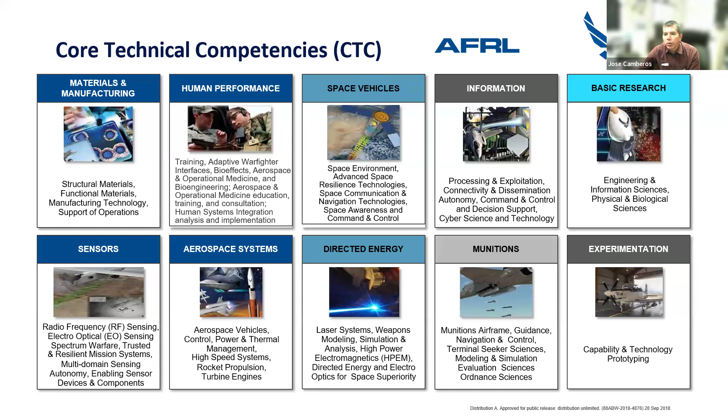The Air Force Office of Scientific Research, where anybody working in academia should be partnering with in terms of basic research, is headquartered in Arlington, Virginia. The experimentation is spread throughout the various locations where the Air Force Research Lab has a presence. You can read the details of this - these slides will be made available, and I'll give you a website where you can check out more.

The way that the Air Force Research Lab invests their funding, which comes from congressional and presidential action, is through basic research, where a good chunk of money is invested primarily through the Air Force Office of Scientific Research and other ways that we utilize that to basically discover new things, test new ideas, ask what-if questions.

The bulk of our funding goes to applied research. The numbers here are just the way that our congressional budget allocates the funding and tracks it. This is intended to develop the science to application. Primarily, we've done some discovery, we figured out the physical phenomena, and now we're ready to do some benchtop or smaller scale experiments.

Next to that is advanced technology development, where we also have significant investments into actually getting out there to develop the hardware, fly things and develop things, and implement them in field experiments and tests. Other Air Force funds that are executed support small business innovation, the SBIR program through the AFWERX program, experimentation, and other investments made to small businesses and also the academic community for supporting non-research and technology development.

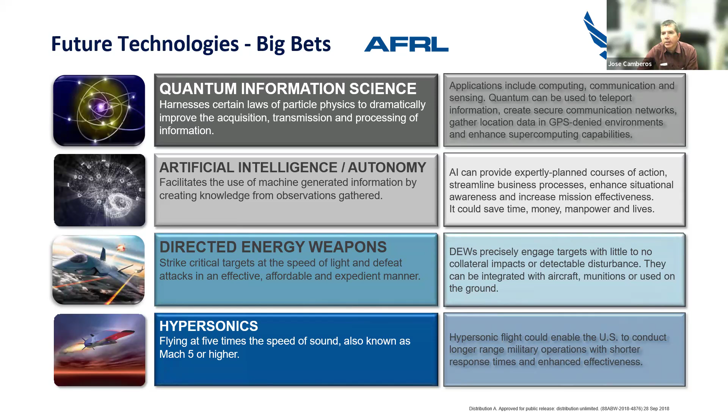And last but not least, hypersonics, my area of interest. We are investing in capabilities that will support our ability to field hypersonic systems now and into the near future. Next slide, please. So how do you partner with AFRL?

There are a variety of ways that you can do that. We should count OFRN, the Ohio Federal Research Network, as part of this ecosystem, if you will, of ways to collaborate.

You can get a lot more information at the afresearchlab.com webpage, where you can find out more about each of the directorates, points of contact, and how to apply for everything you might need - for small businesses, scholarships, fellowships, internships for students who may be interested in working in these areas. And of course, you can always check fedbizops.gov for solicitations for proposals.

We have various centers also to support that. And one last thing - check out YouTube. We all like to watch YouTube, right? We probably don't want to admit how many Saturday mornings we've wasted doing that. But check it out - look for AFRL Inspire for a sampling of videos AFRL has put out on its innovative work.

Next slide, please. Okay, on to hypersonic vehicle technology and some major developments. From here on, the slides are stuff I've used when teaching classes in hypersonics at the University of Dayton and at Wright State University.

Next slide. It begins, believe it or not, soon after the Wright brothers flew. For this seminar, I'm going to talk about hypersonic flow, how we need to understand the relevant physical phenomena that drives our approach to hypersonic vehicle analysis and design. Next slide.

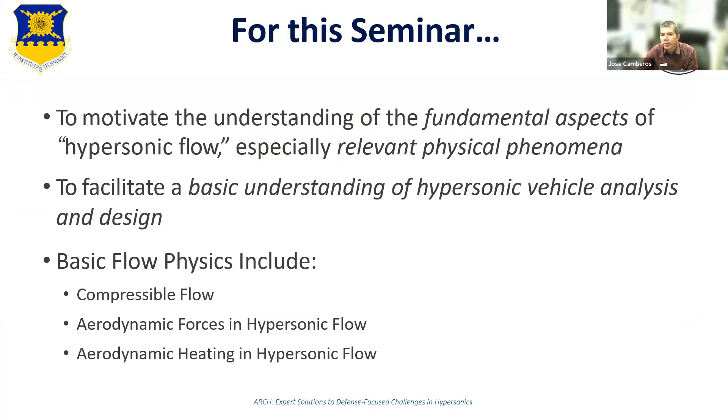It's all about the heat, as I like to say. AFRL has identified hypersonics as a game changer, so to speak.

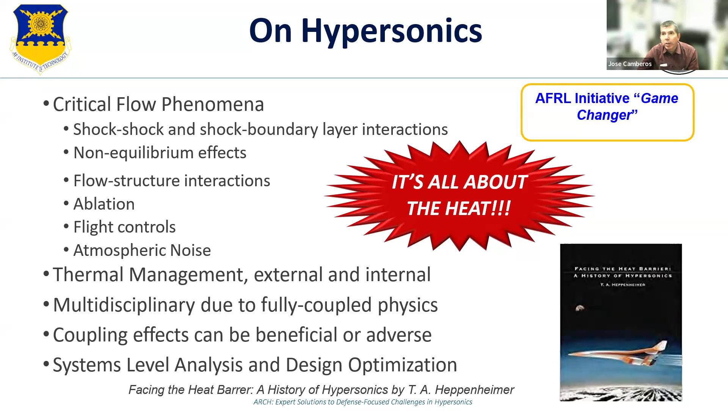If you're interested in some of the history behind hypersonics, there's a great book by T.A. Heppenheimer. It's publicly available, a NASA PDF publication. You can search for it on the web and obtain it. It's a great historical read all the way from essentially the Bell X-1 onto the NASA program from the 1990s.

Next slide, please. So back to the technology. Believe it or not, soon after the Wright brothers flew, there was already wanting to go faster and better, and the technology was starting to catch up.

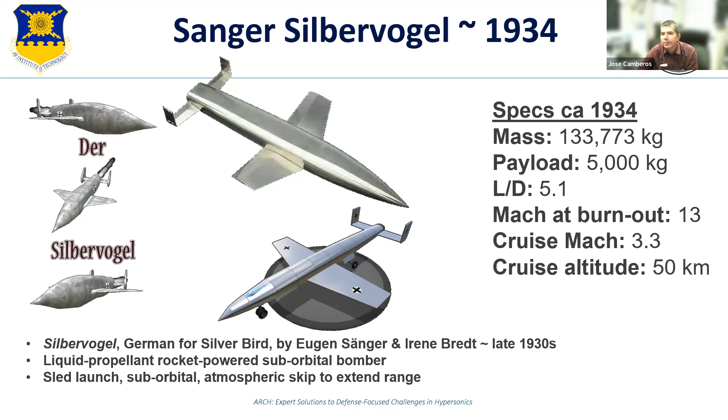The other lesson learned here, of course, is do not name your program after an extinct species. It just gives it bad optics.

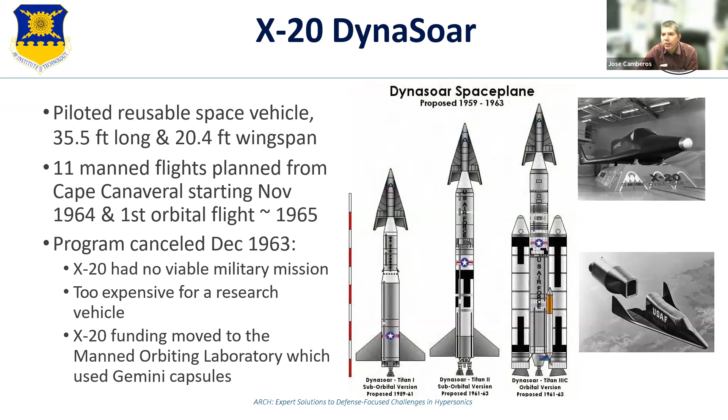So next slide, please. The X-15, one of the most successful hypersonic programs that we've conducted from the 1950s to the 1960s. 199 flights out of a planned 200, and the only reason the last one didn't take place is that, of all places, in Southern California at Edwards Air Force Base, it snowed on the day that they were planning that last flight. 3 vehicles were produced.

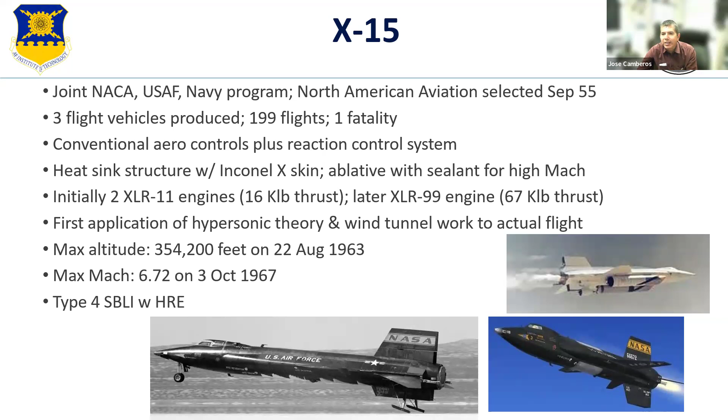We lost one. One is hanging at the Air and Space Museum in Washington, D.C. The other one is right here at Wright-Patterson Air Force Base. Come and enjoy it. Those of you that are in Ohio, come visit the Air Force Museum. I'm happy to go there, meet you there anytime. I need no excuse to go to the museum anytime for anyone that would like to enjoy the airplanes there.

Next slide, please. More recently, we tried to advance the technology in the 1980s and 1990s with the National Aerospace Plane concept. And unfortunately, we tried to rely too much on computational capabilities that weren't quite there yet, and reduce wind tunnel testing. We asked for too many miracles, and this technology remained a paper study. We did expend a lot of money in the research, but the design just could not be achieved.

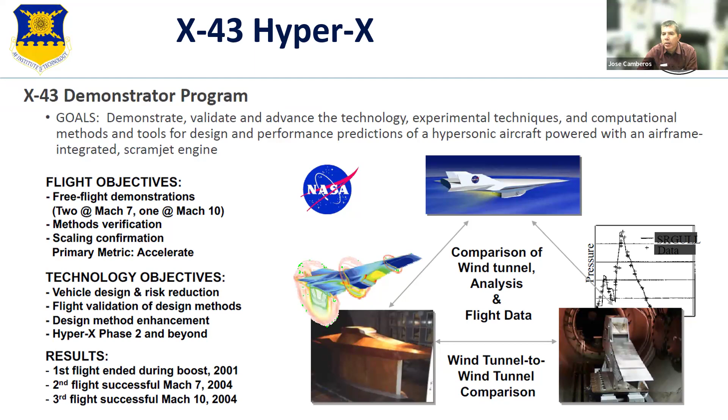Next slide, please. More recently, we have the X-43, the HyperX program. It's a demonstrator program where the flight objectives were really a test of the scramjet technology. This utilized hydrogen as the fuel, and it worked. As far as a test program was concerned, this was a highly successful program that NASA led for our country. Lots of good wind tunnel testing was performed, and it really pushed the advancement of hypersonic technology significantly.

So hypersonic flow, as most of you may know, this is what we teach. Most experts agree that it's around Mach 5 when we consider it hypersonic. There's no magic number where that changes, it's just that certain things begin to happen when you get close to that Mach number. The air behaves differently than our mathematical and thermodynamic models tell us, as it does in subsonic and transonic flow.

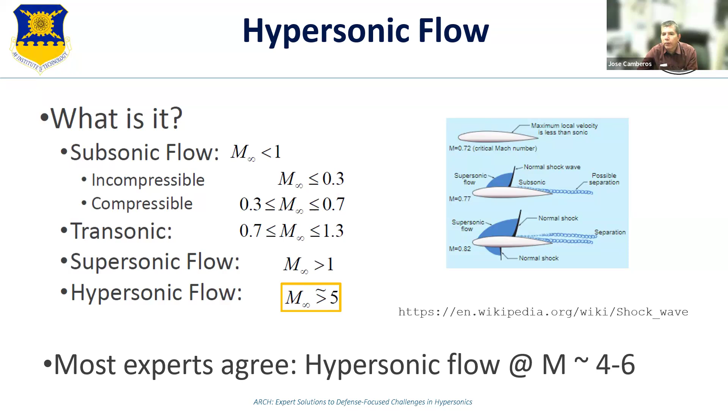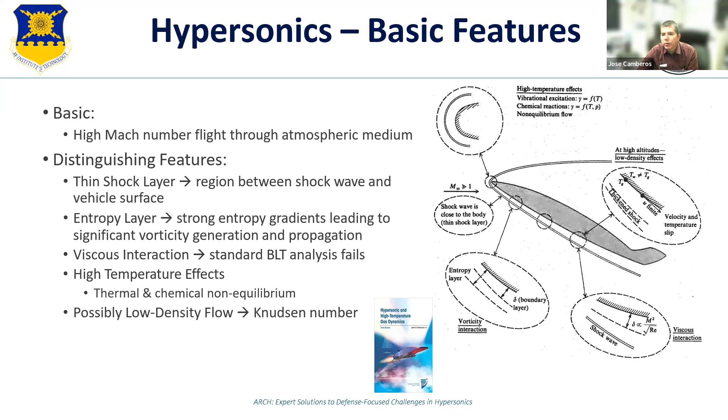So Mach 5 is around where we really look for the physical phenomena. The features we look for are high Mach number, thin shock layer, viscous interaction, and high temperature effects. Remember, it's all about the heat, and possibly low density flows. You can read more about this in John Anderson's book.

Of course, you want to be mindful of these viscous interactions. One surprise that happened with the X-15 program is we had the bright idea of attaching a dummy ramjet engine to test out that technology. Unfortunately, someone missed doing their homework, because the shock interactions with the pylon there almost cost us the vehicle. I can't recall if the ramjet engine was still attached when they landed or not, but as you can see, the shock interactions burned a hole. That is a very strong material, nickel chromium alloy, and the shocks impinging on it were burning through it like the proverbial hot knife through butter.

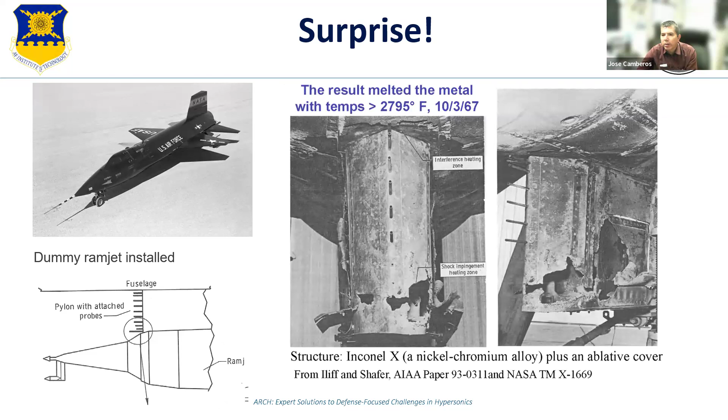So you want to be mindful of the physics that occurs, and also mindful of your models for predicting the things that will affect your design. In this case, a breakthrough occurred in ballistic atmospheric entry by Julian Allen and A.J. Eggers, who determined that the heating is inversely proportional to the radius of your leading edge. That means sharply pointed vehicles are going to suffer extreme heat. So you really want to design reentry vehicles, and be mindful even with high-speed vehicles, that the sharper you make your edges, the stronger the heating. That's one thing I alluded to earlier, when the German concept Silbervogel was very sharply designed. It would not have worked according to what we knew later on in the technology.

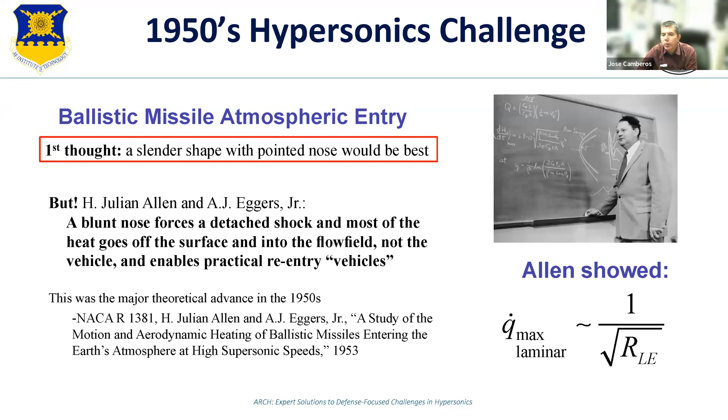Okay, so the other thing we learned with hypersonics is that it turns out to be very easy to compute pressure coefficients. The higher the Mach number, the better this formula becomes. It allows us to bypass the high fidelity CFD computations we normally do and rely upon a very simple model. So that C sub P is the pressure coefficient, and it shows that according to the theory, it becomes Mach number independent. Once you reach high Mach number, computing the pressure distribution over your vehicle becomes a very simple calculation.

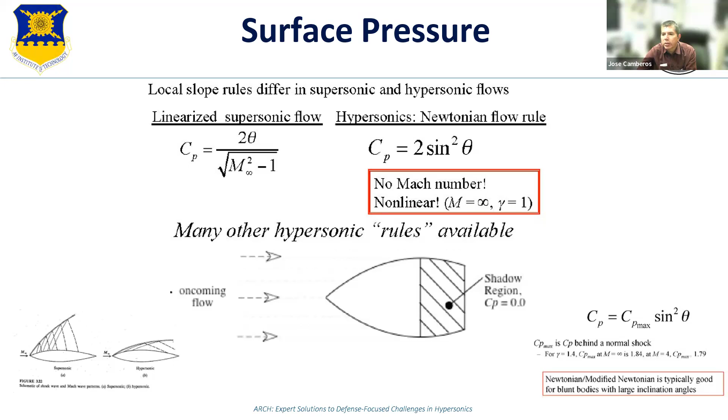In fact, there are software programs available. CBAero is one that's described in that paper by David Kinney. SHABP was the original name for it, developed here at Wright-Patterson Air Force Base in the formerly called Flight Dynamics Laboratory. For a long time that was the standard bearer. Then in the 2000s, NASA invested in updating the techniques utilized to compute there. Now, of course, with computing power, we can decompose a vehicle shaped like this into small panels upon which we can get the pressure coefficient from the formula you just saw in the previous slide.

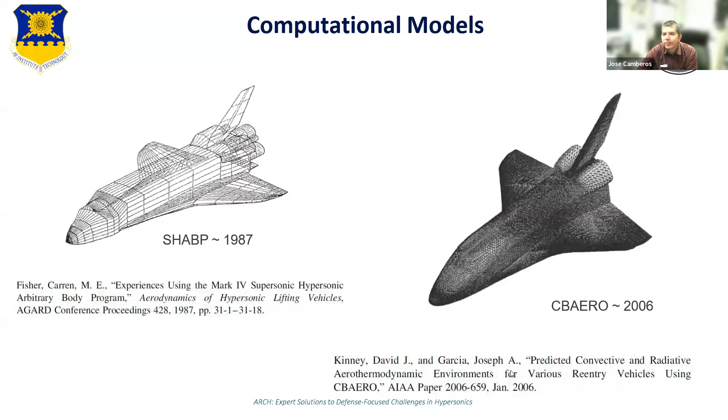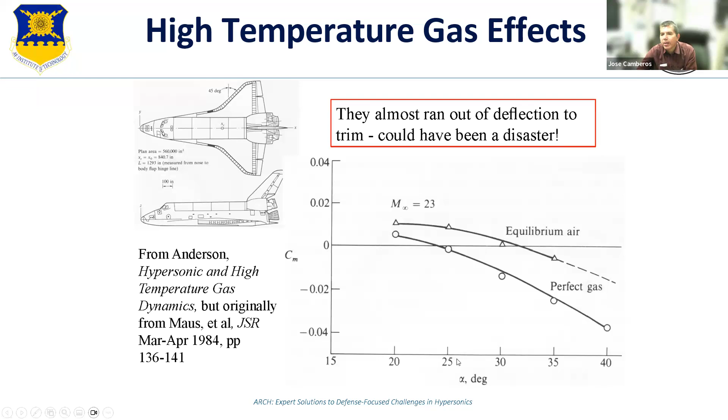Things to note: you need to understand the physics. It's key to technology development. The relevant physics will strongly influence system design, performance, and cost. And of course, how do you get the physics? Well, it's going to be your mission. Your mission determines the relevant physics.

So let's talk briefly about hypersonic vehicle design. How would you approach it? It's really a systems engineering process. You need to integrate a lot of different components. This becomes really complex with a hypersonic vehicle.

This shows a notional tailless supersonic fighter where the idea here is that we want to couple all the disciplines, all the couplings, at the right level of fidelity early on in the design process.

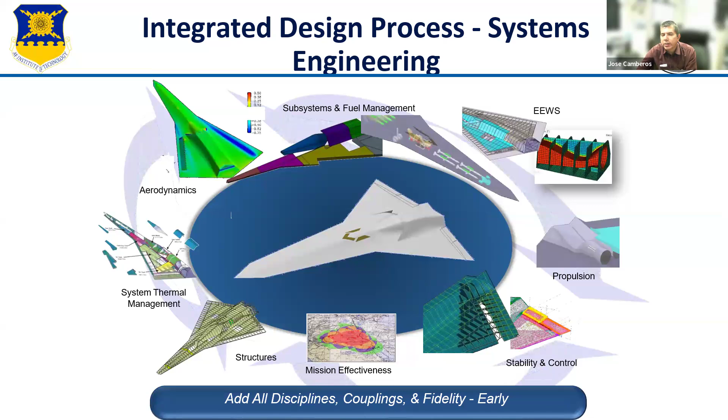Speaking of design, I just want to highlight the blue text here. The secret to good conceptual modeling is to get the level of simplification correct. If you're designing vehicles, you can't just take each different discipline required and plug and play. You need to be mindful of the level of abstraction represented by each of those computational tools. If you try to do it too high fidelity, you end up waiting forever to get any results. And if you do it too low a level, you may miss some of the physics that are going to drive your design.

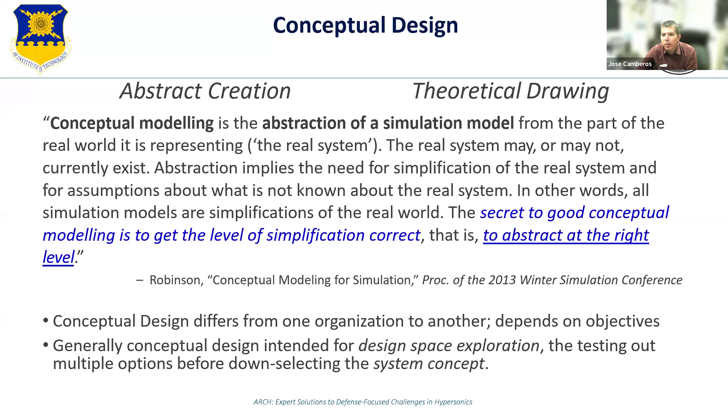Conceptual design in our world is really about system to subsystem, maybe to component level. We call that level 0, 1, and 2 type fidelity. The time frame required to do conceptual design can vary from weeks to months or years. For our research, Boeing, Northrop Grumman, Lockheed Martin get into the detailed design where it takes years, sometimes even a decade, to develop technology.

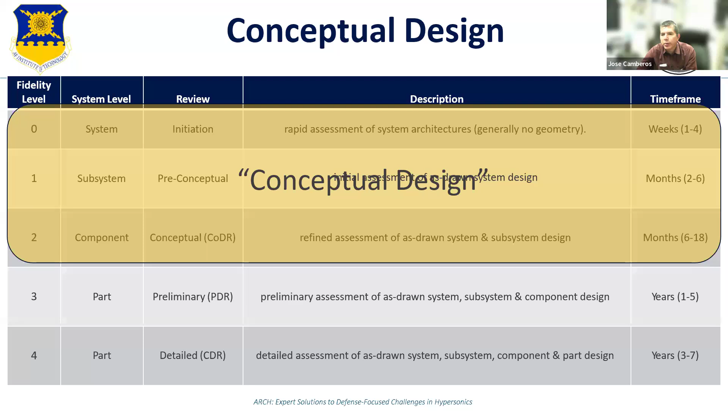This is a cartoon version of what one needs to do given the mission requirements, which determine the physics. You put together your aero, propulsion, structures, and other models. You need to figure out what's the input and output of each of these. How do they interact? Couple them together, run the program, run the design, test to see if the mission requirements are met. If not, you go back and do the loop. Once your mission requirements are met, you have a closed and feasible design.

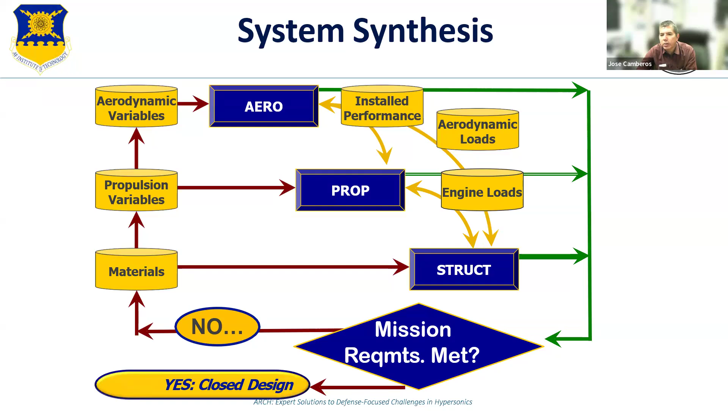This process can be expanded from initial design through conceptual design, through preliminary design to detailed design. It depends on what level of detail you need, what tools you have available, and what their level of fidelity is.

It all begins with geometry. That's why we put that in the middle of the spiral. Once we have a geometry, a shape to work with, we can drive it with each of the different tools we have to analyze its aerodynamic response, propulsion needs, flight dynamics, structural, thermal, and other subsystems that may be needed. You can decompose this to whatever level of detail is needed for your design.

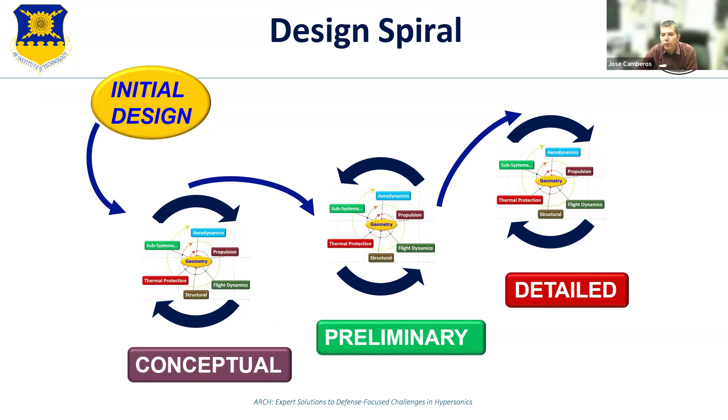For dealing with hypersonic air breathing concepts, it's all about the heat, and you need to be mindful of both how much heat your vehicle is subjected to from the outside and the inside. This was the most challenging thing we encountered with NASP. In fact, it led to an unclosable design. The requirements driving that were such that we just did not have the material capability at that time to sustain the extreme environment to which it would have been subjected.

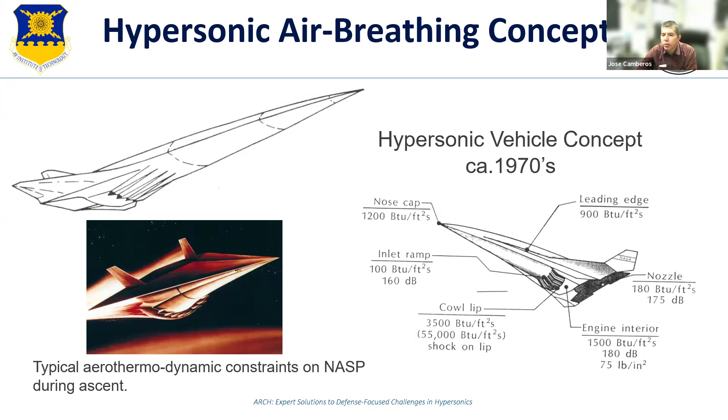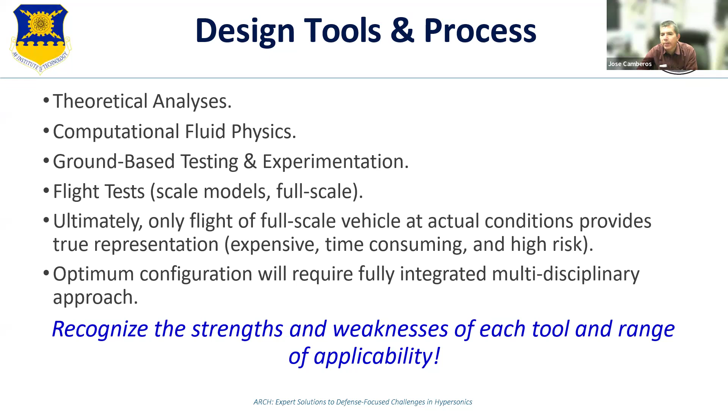More recently, recognize the strengths and weaknesses of each tool. Here you have a variety of different tools available to do hypersonic vehicle development. We have some recent successes.

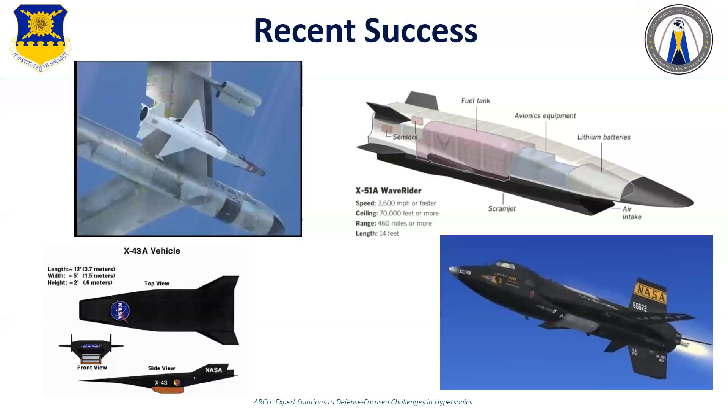Awesome, great, thanks. So our next presenter is Lois Weir. She's an aerospace engineer with over 40 years of experience in design, testing, and technology development of intake ducts for supersonic and hypersonic air breathing propulsion systems. She began her career at NASA Lewis, now Glenn Research Center, in the Propulsion Systems Directorate, where she tested many high-speed inlet models in the 1 foot by 1 foot and 10 foot by 10 foot supersonic wind tunnels. She later left NASA to become CEO and co-owner of Techland Research Inc., a small research and consulting business that provided air breathing technology development to NASA, the Department of Defense, and the aerospace industry. In July of this year, she returned to NASA Glenn as a senior technologist for hypersonic propulsion. Her duties include supporting hypersonic technology projects at the center, mentoring, outreach, and advising center leadership on matters pertaining to hypersonic propulsion. So with that, Lois, I will turn it over to you.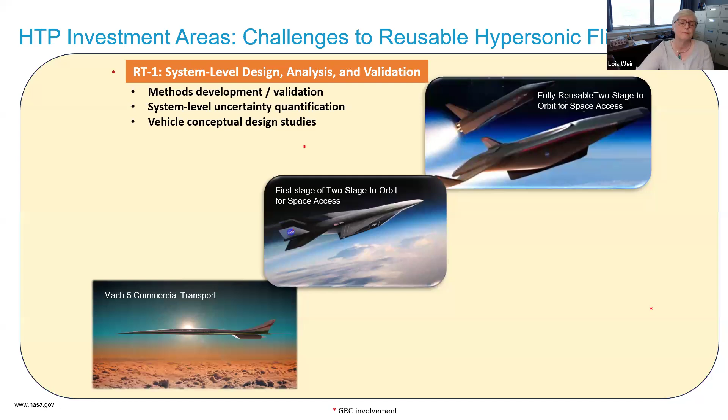These are the basic HTP investment areas, the challenges, if you will, to reusable hypersonic flight. NASA Glenn is performing work in all of these areas except RT3, and we'll talk about all of them in the upcoming slides.

I'm going to briefly discuss the contents of the 2 technical challenges related to RT2 in the blue box there first, and then I'm going to return to an overview of the 4 research topics before I conclude. So let's go to the next slide.

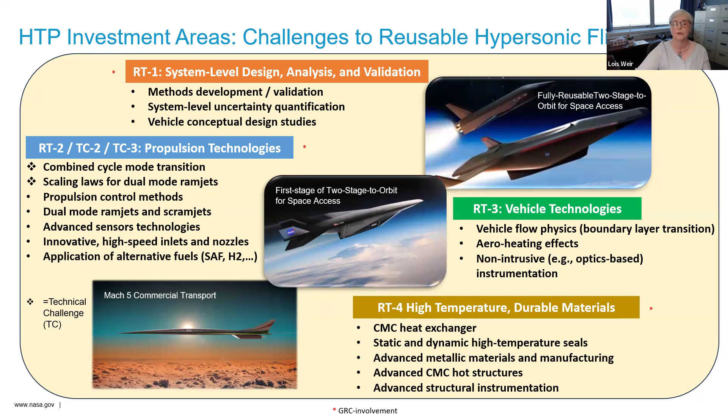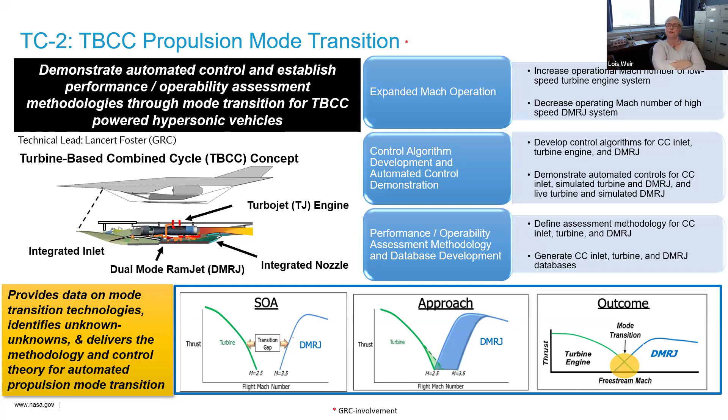Technical challenge 2 deals with turbine-based combined cycle, or TBCC, propulsion technology. TBCC mode transition has been identified as a key enabling technology for TBCC hypersonic vehicles. A vehicle employing one of these propulsion systems uses a turbine engine to accelerate the vehicle from takeoff to some transition Mach number, at which a high-speed engine, such as a dual-mode ramjet, would take over the propulsive responsibility and accelerate the vehicle on to higher hypersonic speeds.

The blue blocks here describe the three major technology challenges of TBCC mode transition: expanding the Mach range, both at the top end for the turbine engine and at the bottom end for the DMRJ. You can see this in the charts at the bottom of the slide. Currently, the state of the art has a gap between those two, and what we need to do is extend the turbine engine up and the DMRJ down to the point where those two curves meet, so we can perform mode transition where they meet in the middle.

The figure on the left shows one of these TBCC vehicles with the turbojet engine in the upper duct and the ramjet engine in the lower duct. There's a variable geometry surface that moves to initially direct the flow into the turbojet engine to take the vehicle up to the transition Mach number, and then that flap closes to redirect the flow into the DMRJ engine.

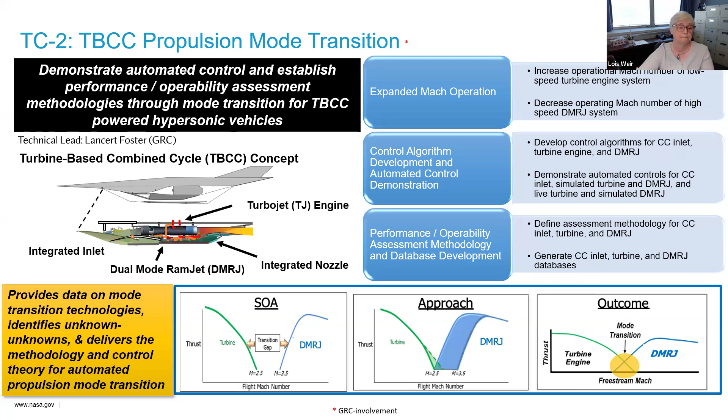TC3 is the newest technical challenge in the HTP portfolio, and this has to do with developing scaling laws for dual-mode ramjets. We can test DMRJ propulsion systems in ground test facilities and get really good information about how to design and operate them.

However, future reusable hypersonic vehicles will be much larger, and combustion systems in particular don't just scale photographically. So TC3 is addressing how we're going to be scaling up our DMRJ engines from test size to demonstration vehicle size. The team is doing a combination of computational analysis to take a look at this problem, and then we'll also be doing ground testing to verify the computational predictions.

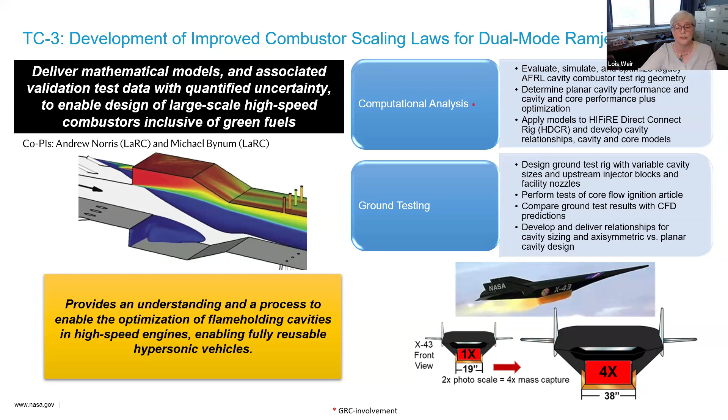The ultimate goal is to develop a deeper understanding of the scaling process and to develop and define processes that will enable optimization of flame holding cavities in high-speed combustors, thus enabling fully reusable larger hypersonic vehicles to work.

Going back to the research topics, research topic 1's objective is to design and analyze hypersonic reference vehicles and use that mission analysis information, or those designs, to inform programmatic decisions and investments. This is done with a team of subject matter experts from all the disciplines it takes to design a hypersonic vehicle.

Because hypersonic systems are very multidisciplinary, we can't analyze just one part, one discipline, or one set of flow physics that govern the operation of a single system while ignoring the others. So the goal of this research topic is to develop strength in all the areas of the aero sciences, from propulsion to vehicle structures and materials.

Our goal is to build a strong design team that will be needed to design multiple systems and configurations for various missions.

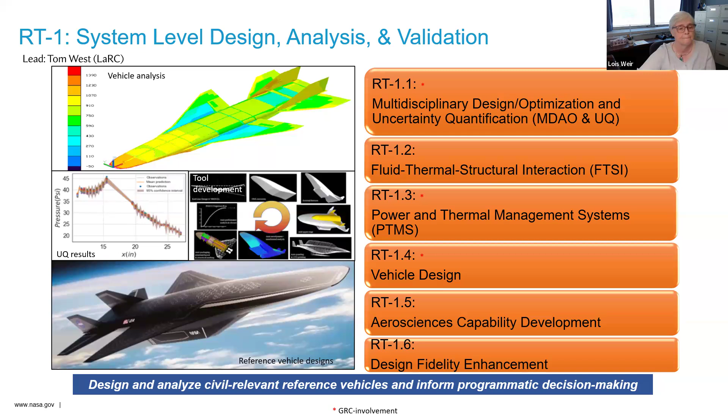RT2 talks about the propulsion technologies topics we currently have. Again, Glenn Research Center is performing work in the areas marked with the red dots on this slide. One of the really important things we're working on right now is developing advanced pressure sensors for adaptive controls and health monitoring of hypersonic vehicles.

As Jose made very clear, high-speed systems are inherently high-temperature systems, and therefore we need instrumentation that works in these harsh environments. So we're developing high-temperature and pressure silicon carbide sensors that can tolerate those environments, and that's under RT 2.4.

Under RT 2.8, we're doing high Mach turbine engine technology development. As I mentioned earlier, TBCC systems will require higher Mach turbine engines to accelerate from takeoff up to the mode transition Mach number, or the Mach number where the high-speed systems will take over.

Also in RT 2.8, we're developing inlet bleed technology and nozzle technologies that are very important and relevant to that area. And then finally, in RT 2.9, we're doing ground testing of the Aether vehicle propulsion system, primarily to develop an experimental propulsion database that will be used in support of the RT1 mission analysis activities.

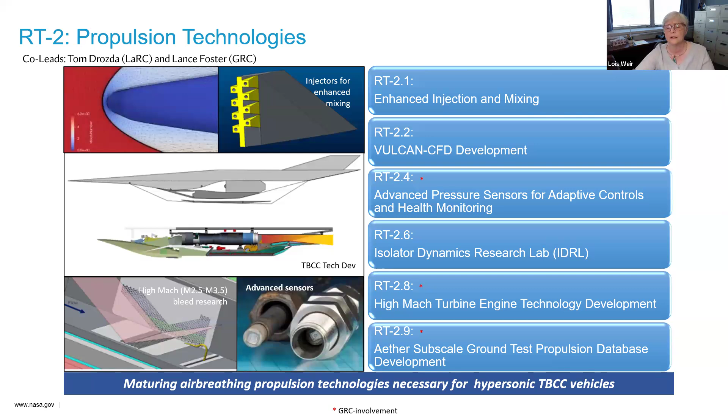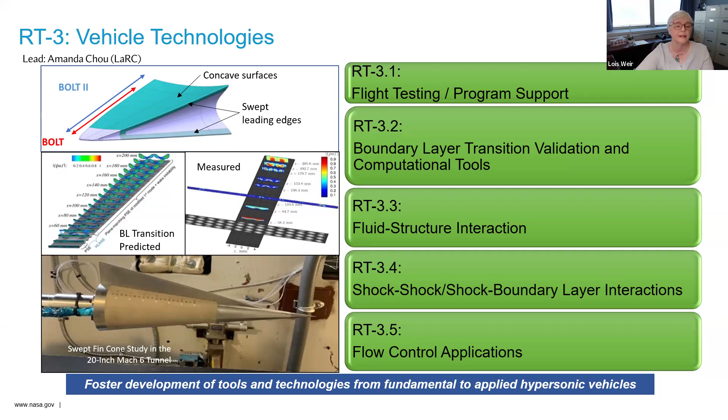Under RT3, the vehicle technologies are being developed, and this work is primarily being led and performed by NASA Langley Research Center.

RT4 is our high-temperature durable materials research topic, and Glenn Research Center is contributing to the 4 elements marked with red dots on this figure. The goal of this area is to demonstrate high-temperature material and component solutions and to provide experimental data and relevant lessons learned to contribute to the development of future reusable hypersonic vehicles.

In 4.1, Glenn is contributing to ceramic matrix composite joining technology development. This is a critical technology needed to join dissimilar materials, particularly for heat exchanger applications.

RT 4.2 focuses on maturing high-temperature seal technologies. We've got a really strong seal group here at NASA Glenn, and seals are super critical for hypersonic vehicles. As an inlet technologist, seals are always one of my primary concerns in any inlet design, and it's particularly acute in hypersonic inlets because you don't want hot gases being ingested in places where you don't want them, where stuff will melt. It's very important that high temperature seals work to prevent mission failures.

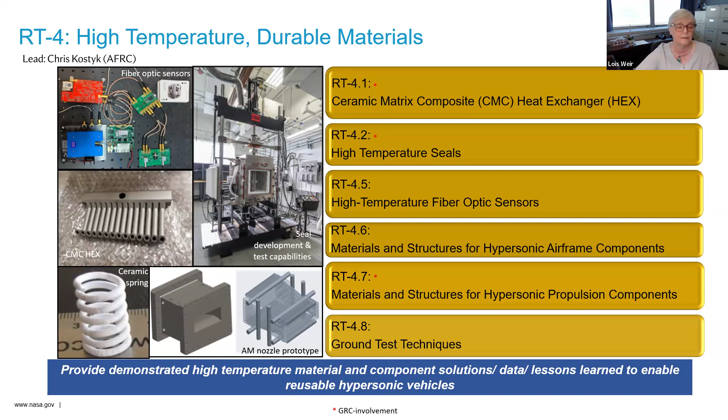And finally, 4.7 focuses on developing advanced alloys. The Glenn team is working on start to finish alloy development and assessment, including powder processing, additive manufacturing, and tension creep and oxidation testing. Next slide, please.

So in summary, HTP, the Hypersonic Technology Project, is working to enable routine, reusable, air-breathing hypersonic flight. NASA Glenn, in particular, is contributing significantly in the areas of system-level design, analysis, and validation, propulsion technologies. Glenn is, after all, NASA's main propulsion laboratory for air-breathing propulsion, and high temperature and durable materials. And of course, we do have existing collaborations with other government agencies, especially the Department of Defense.